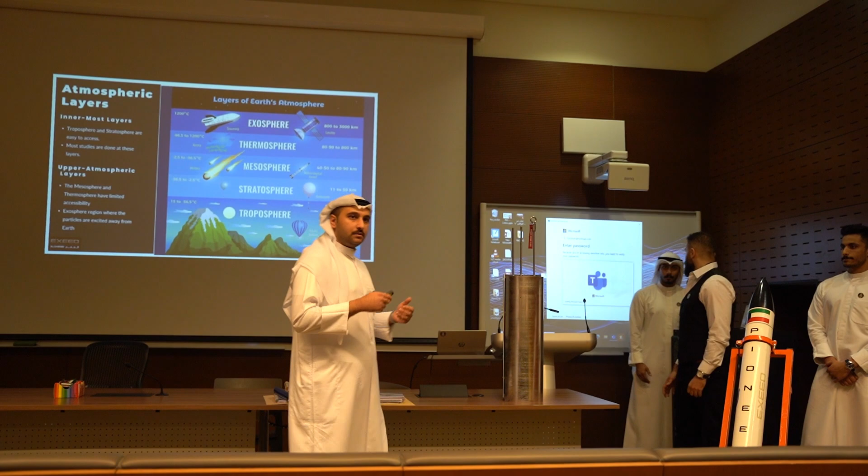The atmospheric layers, as you can see, are 5 different atmospheric layers, which are the innermost ones, the troposphere and the stratosphere. Since they are low in altitude, we have many studies about them, and they are where most of the weather occurs. The upper atmosphere, starting from the mesosphere until the exosphere, is much higher.

We have little studies about them, but it is important to study these atmospheric layers because they enable us to make future predictions about climate change, and because they affect matters concerning the ecosystem and the safety of occupants on Earth. It was found through study that there is a phenomenon taking place right now called the

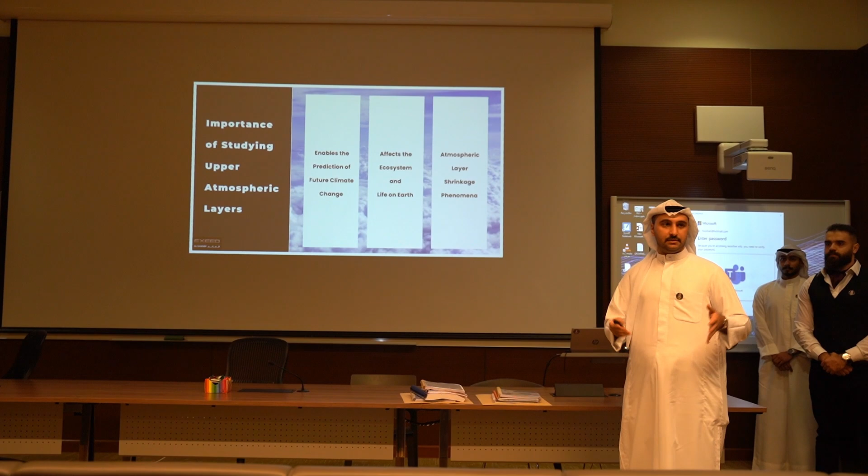shrinkage of the atmospheric layers. This shrinkage of the atmospheric layers would make it much easier for space debris to enter our ecosystem, making it unsafe for occupants on Earth. So it means there is a necessity for studying these upper atmospheric layers.

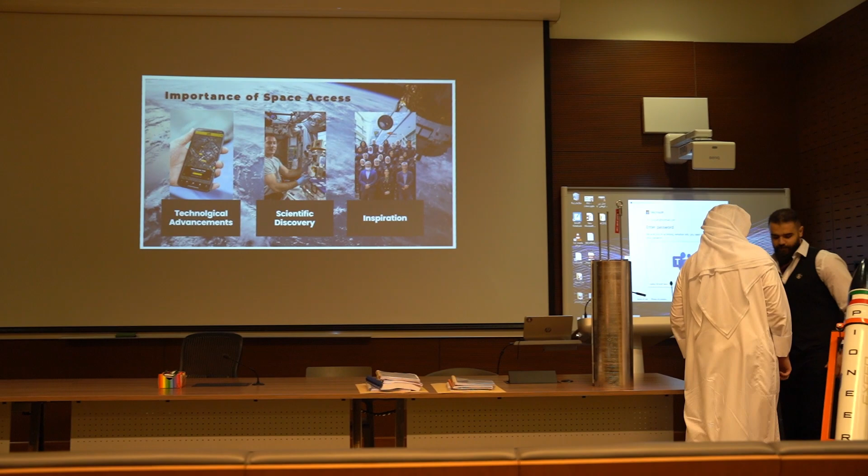Now, going for the importance of space. Space plays an important role in many aspects of our lives: television, communication, navigation, and security control systems that we rely on nowadays on our daily basis, like GPS and mobile phone calls that we can't do without.

Also, technological innovation by-products, same like CAT scan and mobile phone cameras, that we rely on nowadays. Also, it encourages the youth for STEM fields, which is science, technology, engineering, and mathematics field.

But now, how to reach space? Space can be reached via 3 different flights: planetary flights, orbital flights, and suborbital flights.

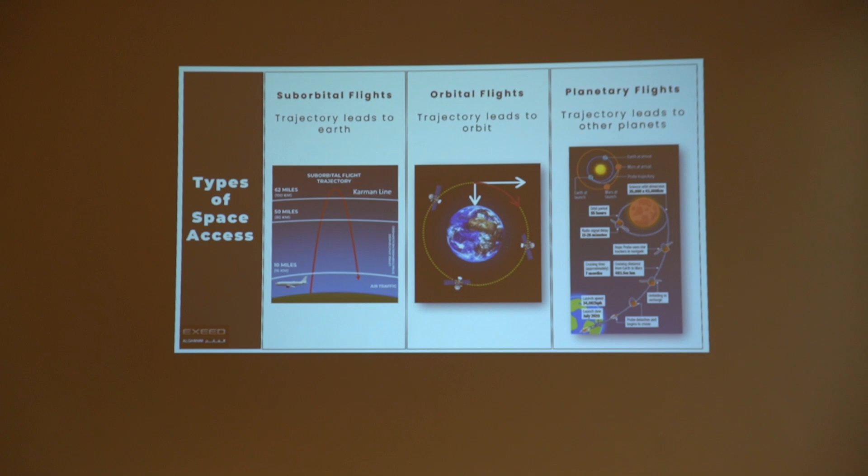Let's start first with the planetary flights, which are the type of flights that requires planetary velocity in order to reach other planets if there is a need to conduct some experiments there and to stay for such a long time.

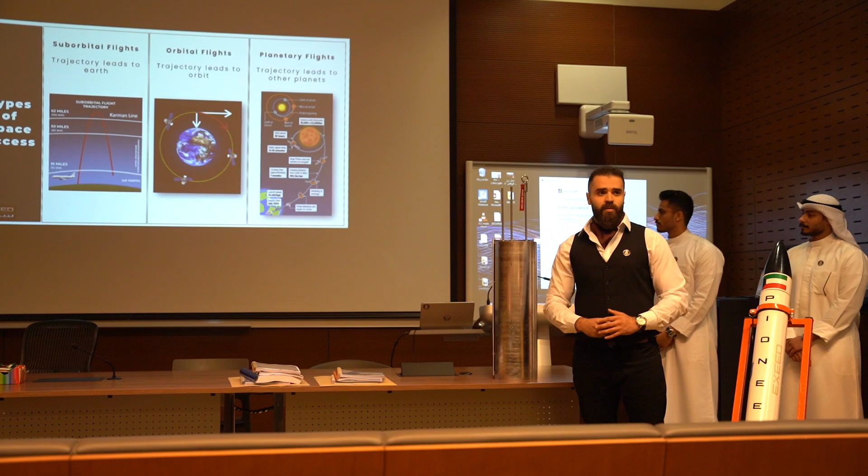Going for the orbital flights, which are the flights that require reaching an orbital velocity in order to reach a predefined orbit if there is a need to conduct some experiments there, and it's basically for communication and navigation reasons. Going for the cheapest and most affordable way to reach space, which is via the suborbital flights.

They are the type of flights that requires a velocity less than orbital velocity in order to go in a predefined trajectory and return back to Earth after conducting some microgravity experiments and atmospheric experiments there.

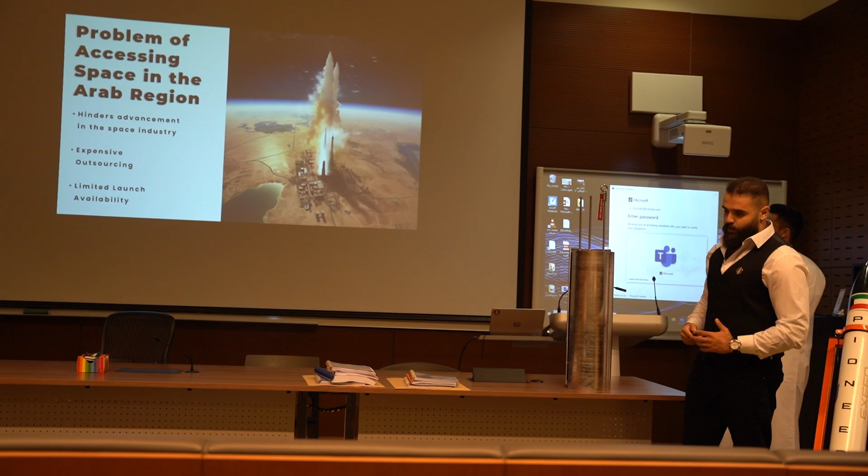Now, the problem is that we can access space, but only from foreign countries. We cannot access space locally from the Gulf. That's why there's a problem. They put us in their time frame, in their time schedule, and they put their flights in priority over

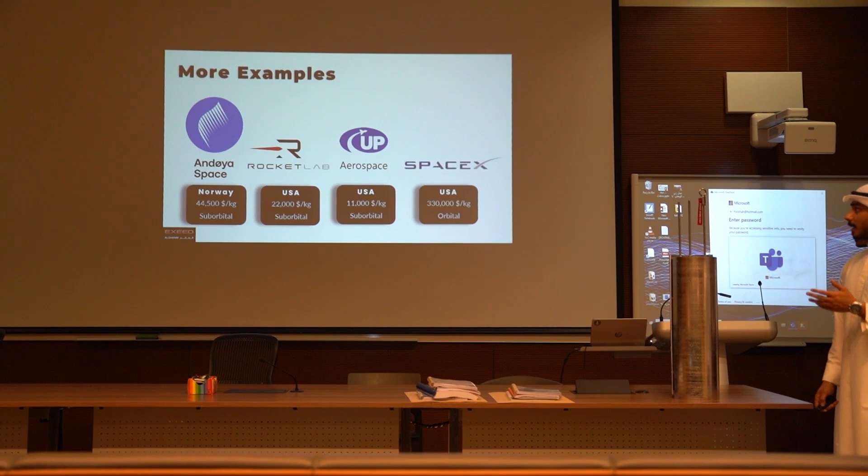Moving on with more examples of companies that provide access to space. There are many companies that provide access to space, but it can be shown here some of them.

For example, we have Andøya Space. It is a Norwegian company with a suborbital flight. It lands payload with a cost of $44,500 per kilogram of payload.

Another example of an orbital company is SpaceX, which launches payload to space at a cost of $330,000 per kilogram of payload.

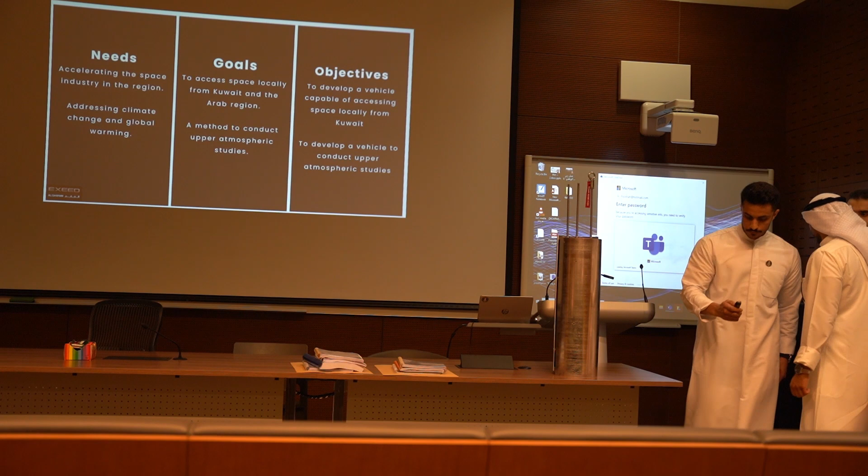So after thorough research in both space and the atmosphere, we see a need to accelerate space and its industry in the Gulf and the Arab region, and also to address climate change and global warming. So the goal of this project is to access space locally from the Arab world and Kuwait, and also develop a method to conduct upper atmospheric studies. This will be done by developing a vehicle capable of reaching both space and the upper atmosphere.

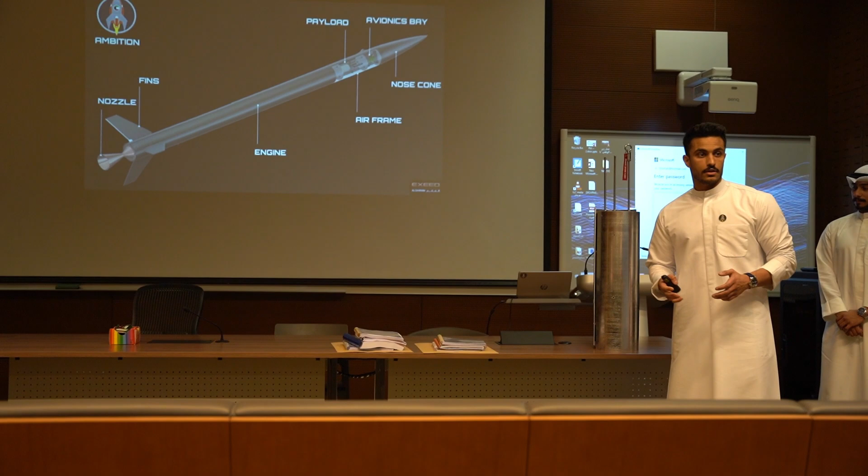So the solution to this was to develop a rocket. This rocket is composed of various sections that work in parallel together. We have the first section, the nose cone, the avionics bay, airframe, payload, engine, and nozzle. They work together to reach altitude and succeed in the intended mission of the rocket.

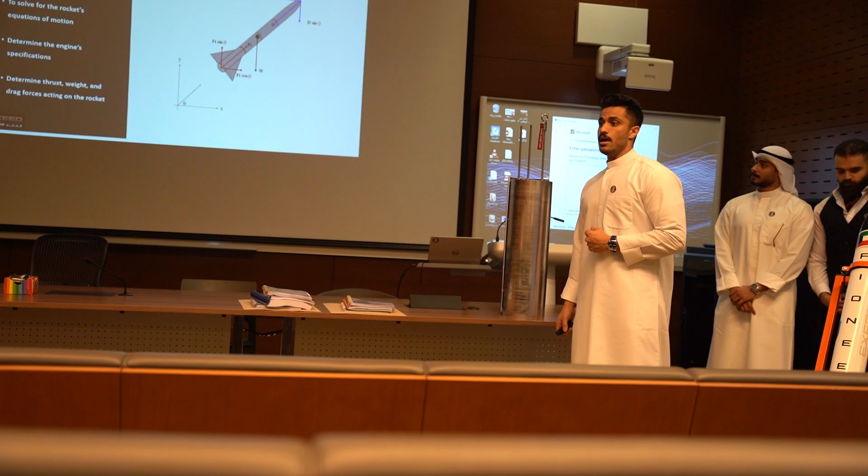So initially, before designing any component, we started with a flight analysis. Through this flight analysis, we can gain the necessary criteria and values required for design, such as thrust force, weight, and drag. We started with the rocket's equation of motion that took into account the various forces on the rocket, and also the variation of density, pressure, and the mass of the rocket as it ascends in altitude towards space.

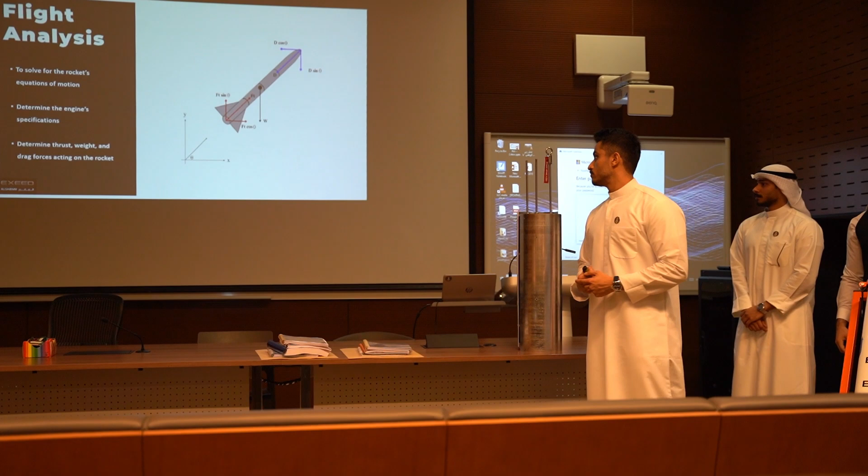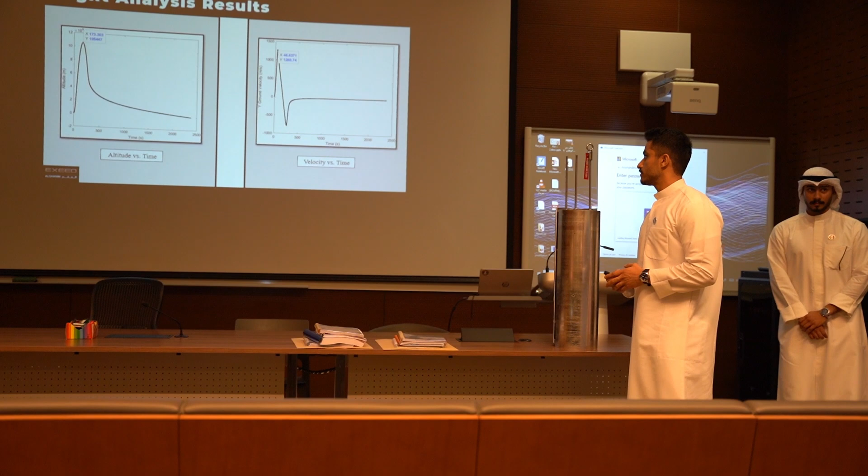The code used was provided by the KSR team through engineer Simon Faith, and through the code we can also get the engine specifications, such as the amount of fuel and the nozzle specs that would aid in selecting the engine. After various iterations of the flight analysis, we got these figures here.

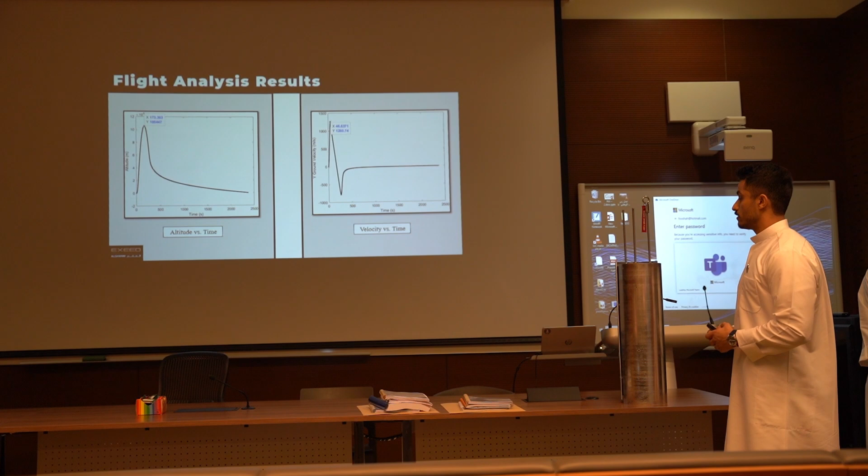These figures take into account the parachute ejection altitude, and you can see that the max altitude occurs at 105 kilometers, which means the rocket was successful in reaching space. And after that, the descent, you can see that with time it becomes slower and less steep. This is because the parachute is ejected.

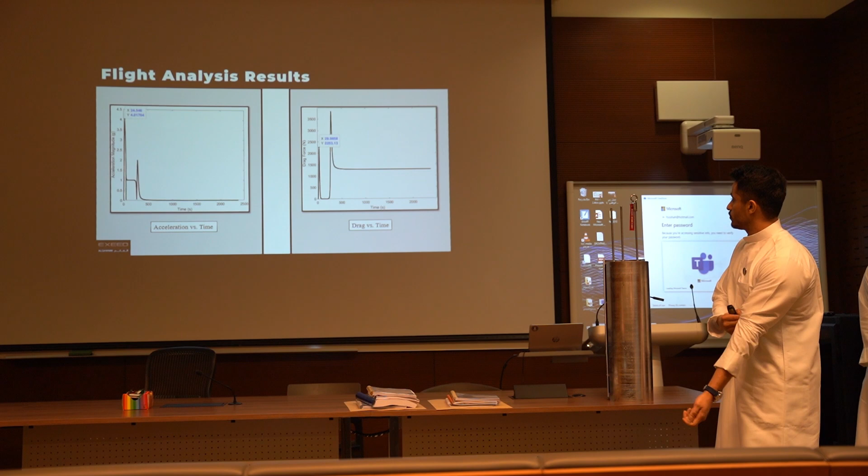And for the velocity, we reached a max velocity of 1,260, which is around Mach 3.6. For the acceleration, we got a max acceleration of 4 Gs, which is 4 times the acceleration of gravity of Earth. And the max drag force, you can see the first peak is 2,253 newtons.

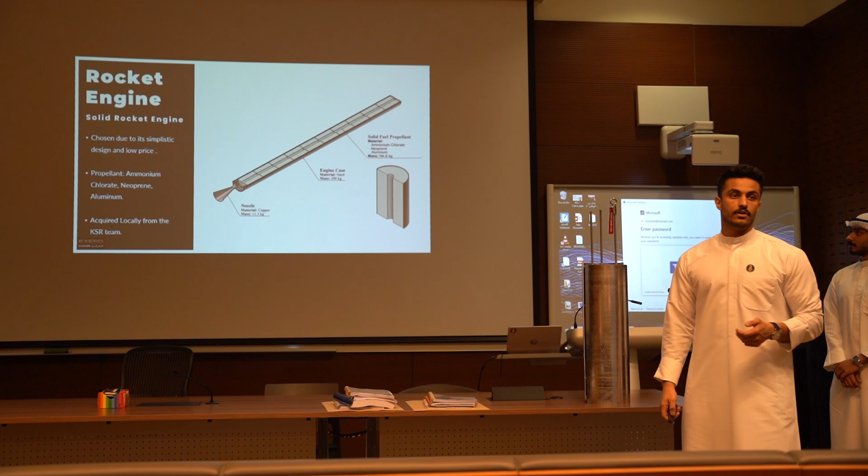The second peak is the ejection altitude of the parachute. And now for the rocket engine, we selected a solid rocket engine based on neoprene, aluminum, and ammonium chlorate. The choice was due to the ease of manufacturing and less complexity compared with other engines such as hybrid and liquid. And the engine would be acquired locally from the KSR team.

The total propellant mass was 184.6 kilograms, and the thrust produced by the engine would be 8.73 kilonewtons.

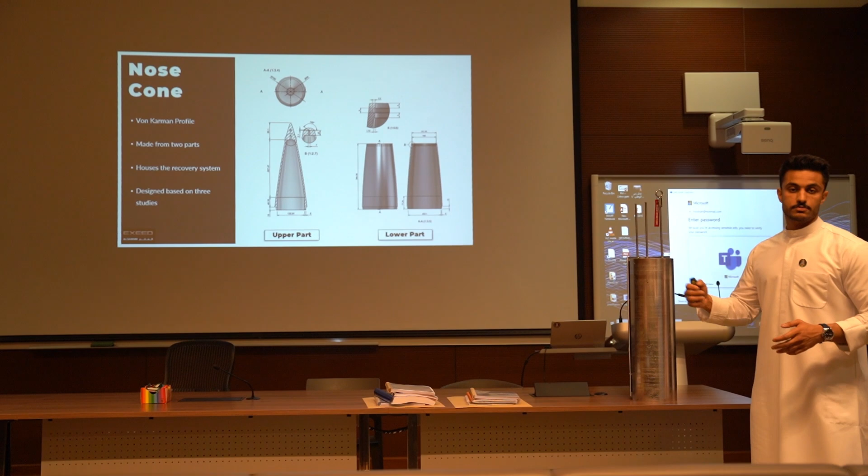For the first designed component of the rocket, the nose cone, we selected the von Karman profile from various profiles due to its aerodynamic superiority. It was designed to be made of 2 parts, a top part of aluminum and a lower part of PLA for mass conservation purposes. It houses the recovery system and acts as a drag reduction component.

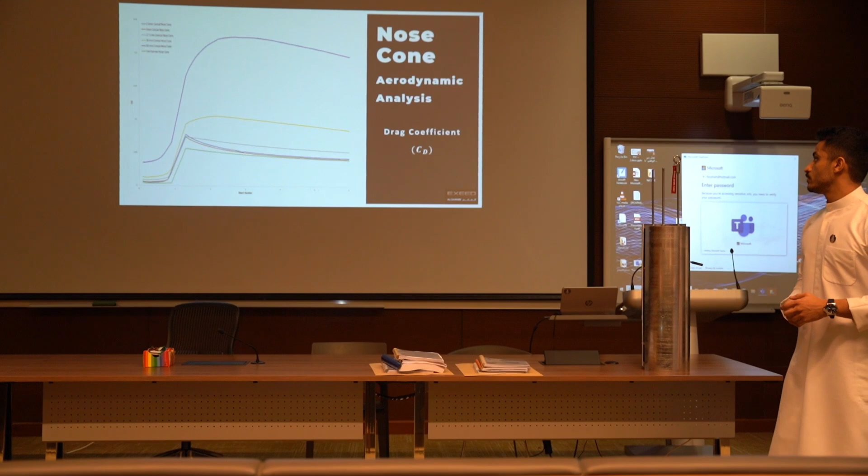So the design was based on various studies. The first study was an aerodynamic study based on COMSOL that used the high Mach number flow module. Through it we tested 6 different profiles, conical shape profiles with varying fillets, and the von Karman profile. As expected, the best aerodynamic performance goes to the von Karman due to the least coefficient of drag values.

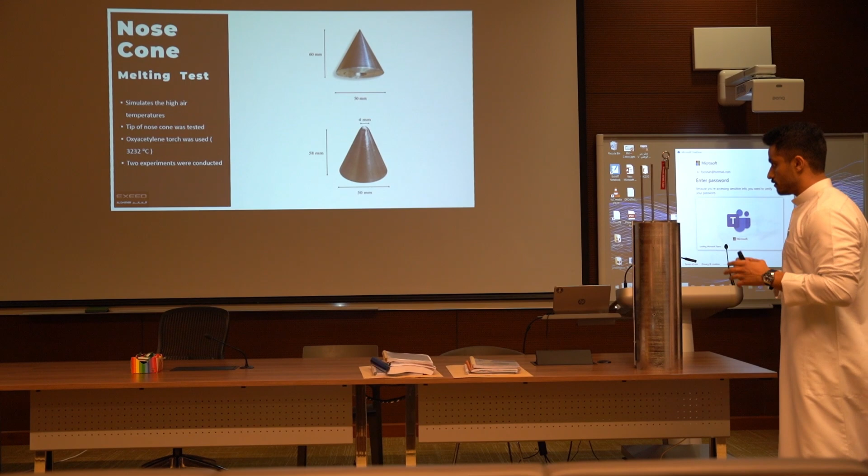So after that, we did a couple of tests to check whether the tip of the nose cone would melt due to aerodynamic heating. We did this test because through the aerodynamic analysis, we got a max temperature of 1,400 Celsius, and this might melt the tip of the nose cone.

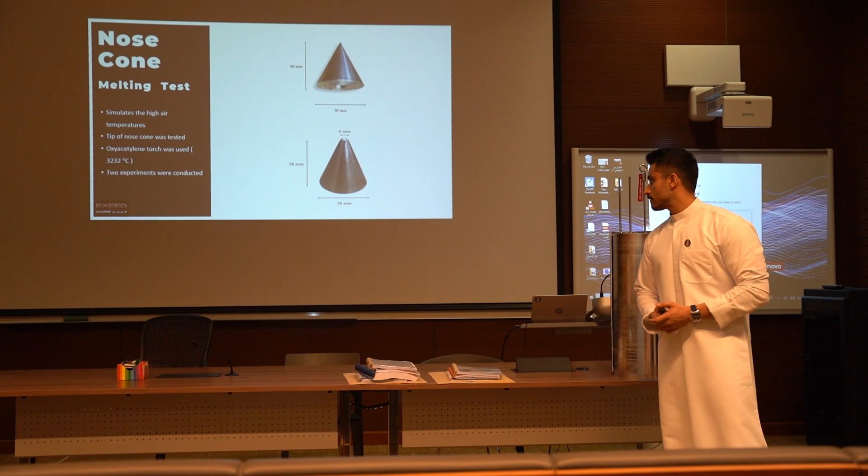This experiment used an oxyacetylene torch producing a neutral flame reaching 3,232 Celsius. We tested two tips, one filleted and one sharp.

For the sharp tip, it started to melt at 10 seconds and was neglected. We went ahead with a filleted nose cone, which sustained the temperatures up to 25 seconds, and it was chosen for the rocket.

After that, we did a structural test to check whether the PLA would take the forces. It was a static test based on putting plates on top of the PLA part, and it sustained the max drag force of 2,200 newtons. By simulation, that's around 240 kilograms of weight. Now I'll leave you with Hamad to talk about it.

Going for the airframe: as you can see, it consists of 3 radial threaded rods with aluminum plates in between, with air covers surrounding them, and bolts that connect the air covers to the aluminum plates.

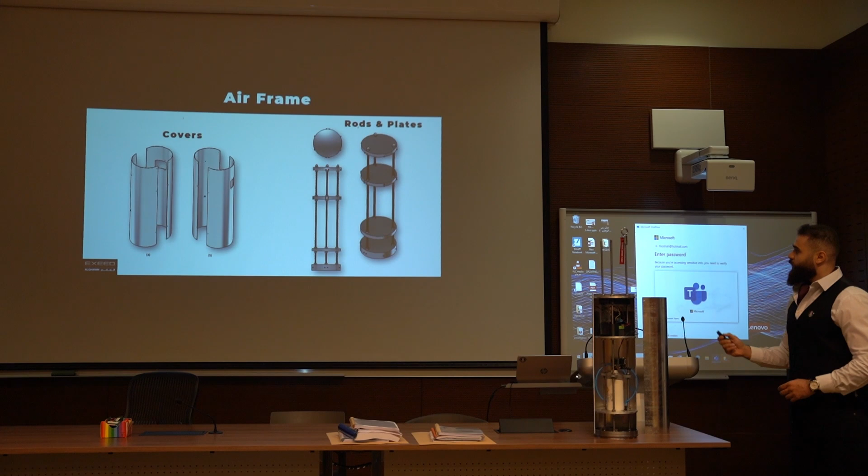We conducted a free body diagram of the whole rocket to see what type of loads it will face during flight. It results that the airframe will be squeezed between two normal forces at the top and bottom, calculated to equal 5,943 newtons, and we based our stress analysis on this value.

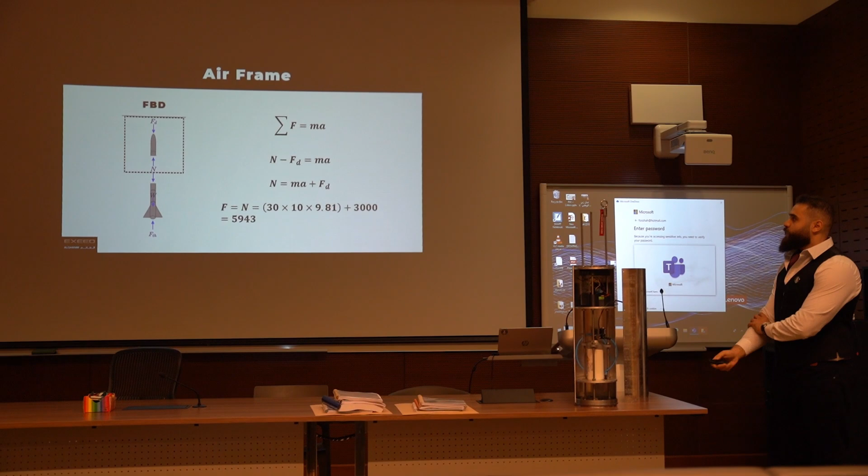We did 4 types of stress analysis: buckling, compression, shear, and bending. Buckling and compression analysis were done via COMSOL, and shear and bending stress analysis via MATLAB.

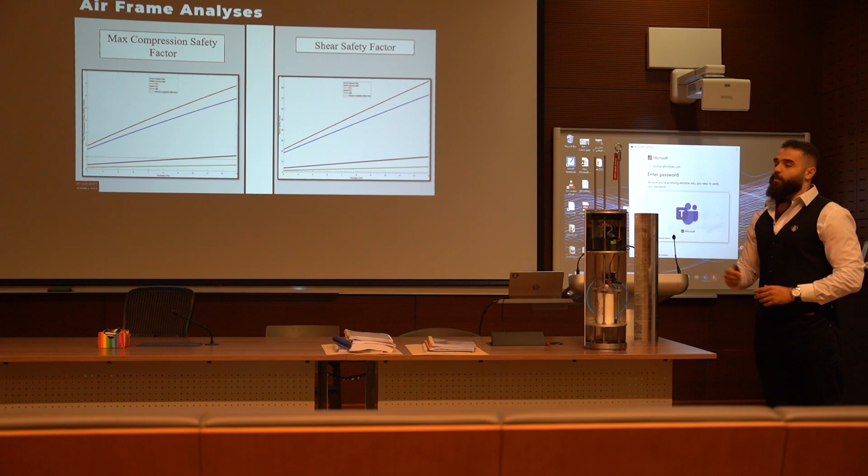Stress analyses were done and safety factors calculated to prove the design will take the load. It resulted that having 3 M12 stainless steel threaded rods with 8 mm thick aluminum plates and 3 mm thick aluminum air covers will take the load.

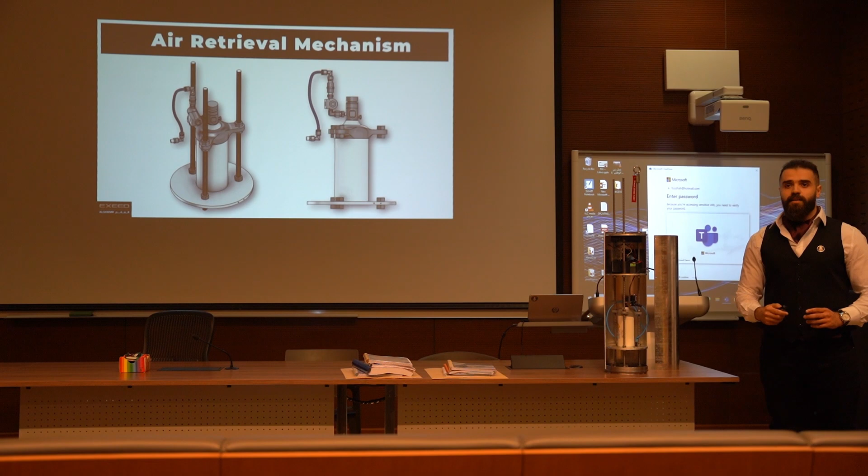Going for the air retrieval mechanism, which aims to retrieve 1 liter of air at 50 kilometers altitude above Earth's surface during deployment of the rocket. The air sample is then studied in the laboratory for its chemical composition, to try to stop the propagation of climate change and global warming phenomena that we are facing nowadays.

As you can see, it consists of a ground evacuated air tank, valve fittings, a solenoid valve, and a hose that connects the outside with the inside.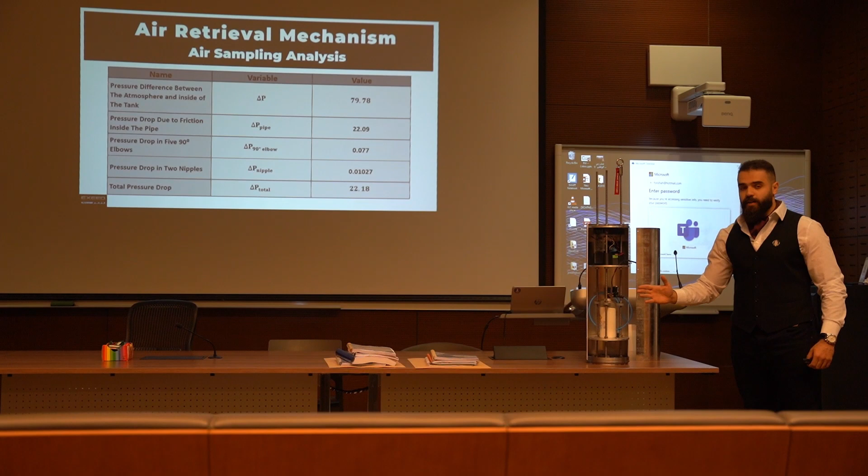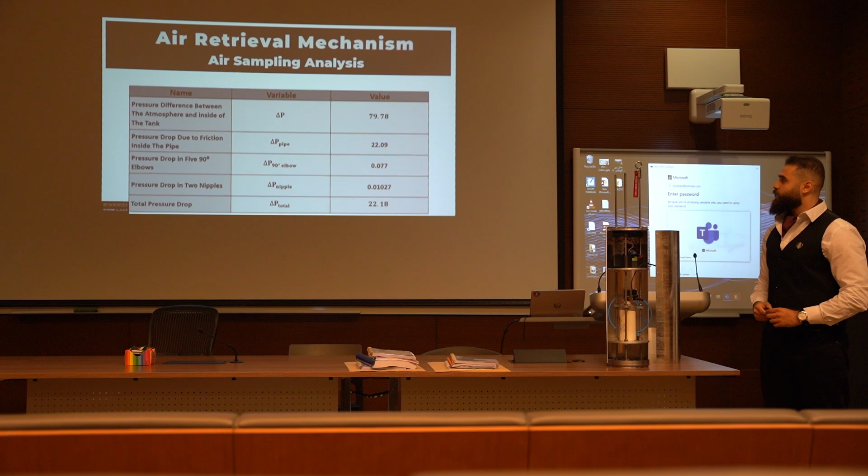It functions when the altimeter inside the avionics bay, the flight computer, sends a signal to the solenoid valve that the rocket reaches 50 kilometers above Earth's surface during deployment, letting the valve open. Air will enter the tank due to the pressure difference. Calculations were done to prove that the air will enter the tank due to just the pressure difference, with no outside pumping source.

Now I leave you with Basil for the avionics bay and recovery system. The recovery system was designed with the purpose of recovering the payload safely and reusing the rocket, or most of its components, for economical reasons.

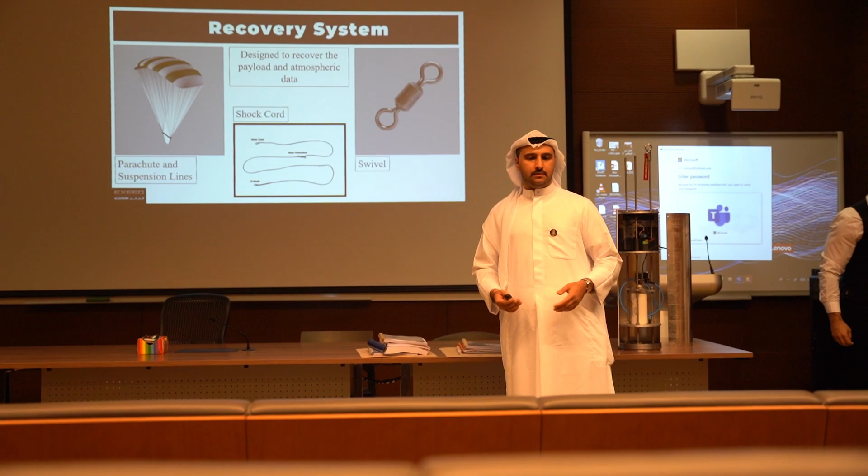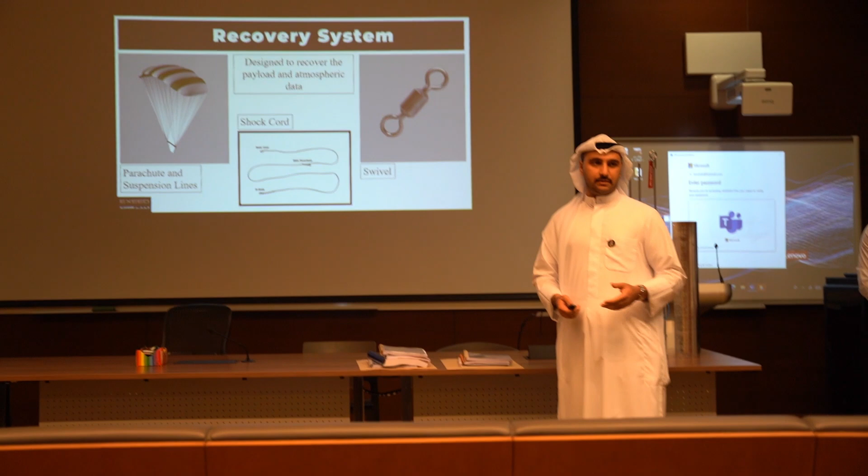The recovery system consists of several components such as the swivel, the shock cord, the suspension lines, and the parachute. The parachute has a diameter of approximately 5 meters, found using an aerodynamic analysis based on the amount of drag force acting on the rocket during descent.

The final component of the recovery system is the ejection piston cylinder mechanism, designed based on the isentropic expansion of the solid fuel located in this chamber. Upon expansion, it causes the piston to eject the nose cone and the parachute with it, initiating the recovery process.

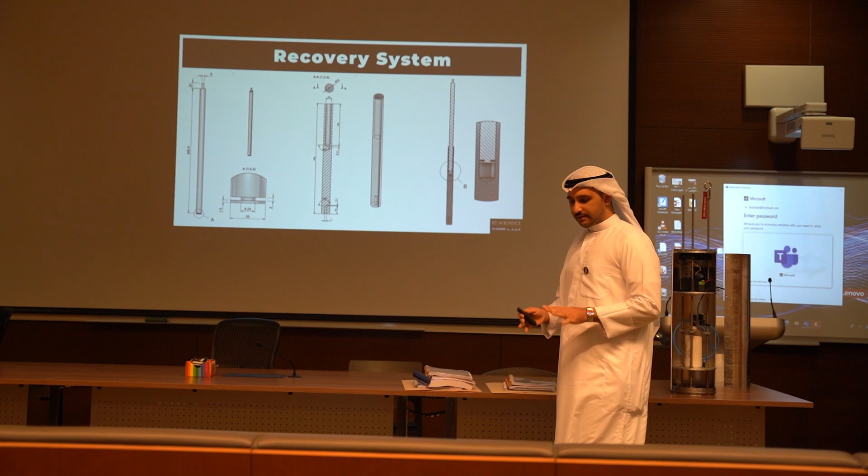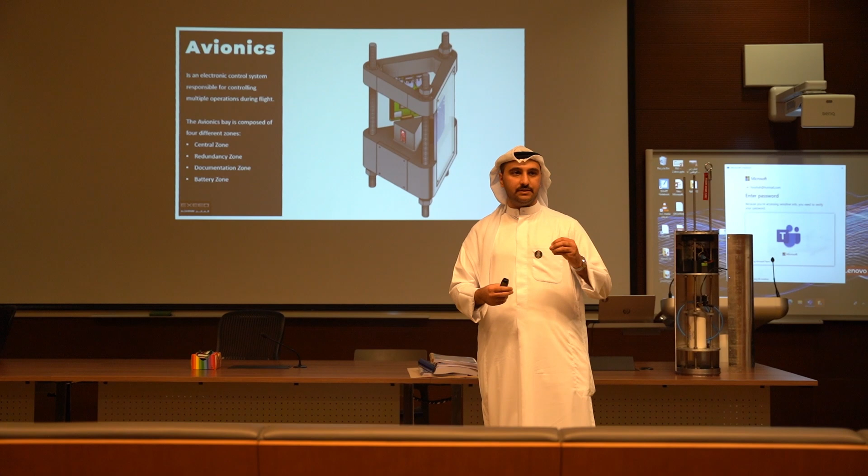After getting familiar with the complex operations taking place during flight, there was a need for a control system that can monitor and control all of these operations. This control system is commonly known in the aerospace industry as the avionics system, a set of sensors and microcontrollers that work in integration with each other to perform a series of tasks and operations.

As you can see, it's located in the avionics bay, divided into four different zones: the redundancy zone, where extra microcontrollers and sensors can be added to the system.

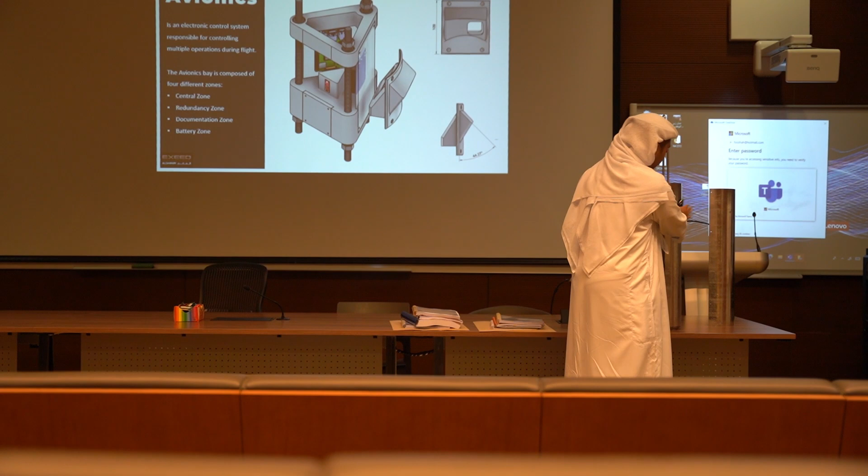The documentation zone houses a GoPro housing that will document the entire flight. A battery zone was designed based on heat transfer analysis to keep the battery compartment within operating temperature. And a central zone that houses the central circuitry.

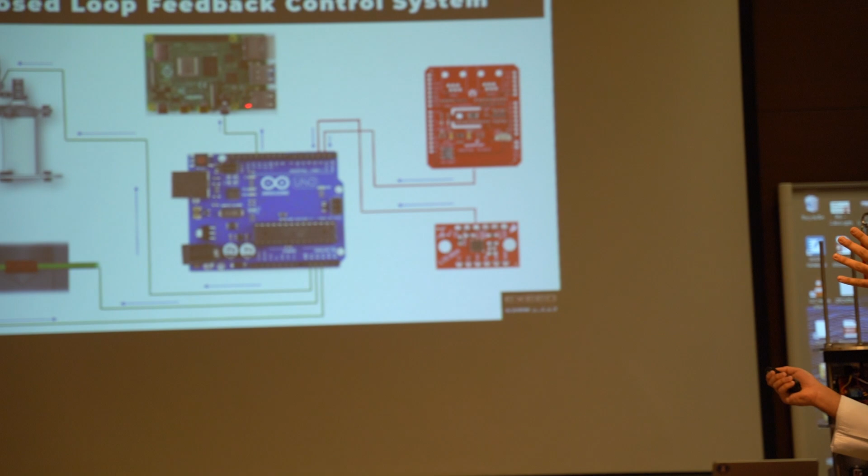The circuitry was designed for a closed loop feedback control system that depends on 6 sensors: temperature, humidity, acceleration, pressure, gyroscope, and magnetic field, which send serial analog data to the Arduino. The Arduino performs 2 functions: one is to send backup data to the Raspberry Pi, and the other is to operate the air retrieval mechanism, the solenoid valve, opening and closing it at the predefined altitude of 50 kilometers, and to ignite the nichrome wire in the ejection mechanism to commence the recovery process.

Now I leave you with Isa on the fins. And now for the fins.

The fins play a crucial role in maintaining the stability of the rocket throughout the flight by increasing the distance between the center of pressure and center of gravity. This is due to the increased surface area and lowering center of geometry. So during the flight of the rocket, it may face an inclination angle, and a lift force will act on the center of pressure, creating a moment around the center of gravity to return the rocket back to its original path.

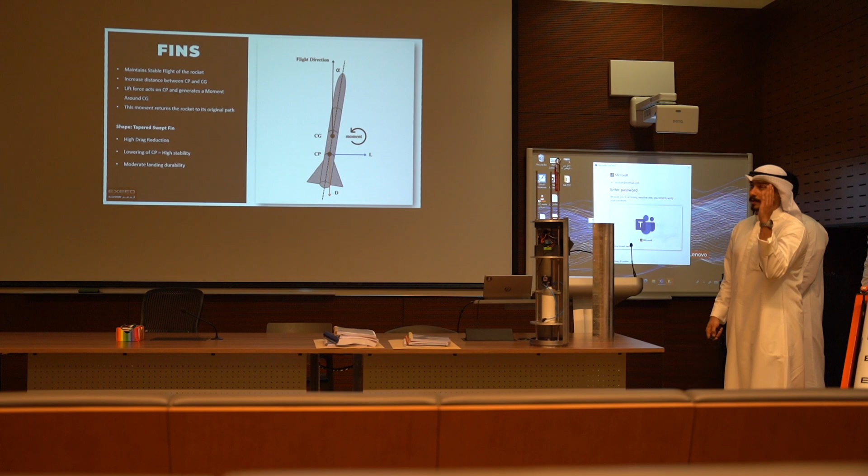For the shape of the fin, we chose a tapered swept fin due to its high drag reduction and high stability.

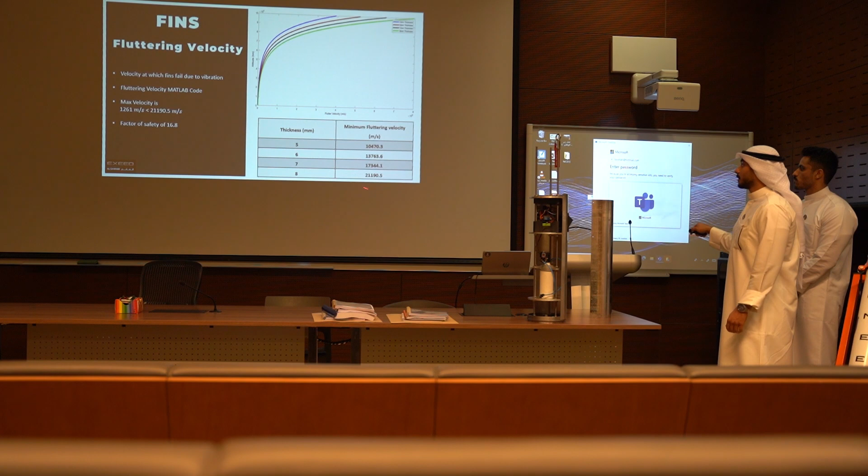Now for the fluttering velocity, the velocity at which the fin will fail due to vibrations. We developed a MATLAB code that calculates the fluttering velocity versus altitude for different fin thicknesses: 5, 6, 7, and 8 millimeters. We chose the 8 millimeter thickness fin because it has the highest minimum fluttering velocity.

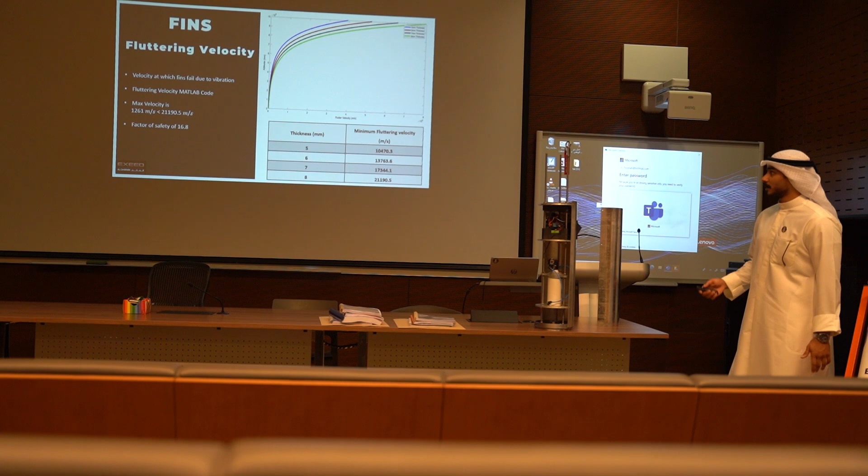To ensure that the fin won't fail due to vibrations, the maximum velocity of the rocket must be lower than the minimum fluttering velocity. Our maximum rocket velocity is 1,261 meters per second, which is much lower than 21.1 thousand meters per second, giving a factor of safety of 16.8.

After that, we inserted the 8 millimeter thickness fin into Open Rocket Simulator, a program that simulates the rocket and tells if it is stable during flight. We put in the 8 millimeter thickness, and through many iterations, we found the other parameters of the fin.

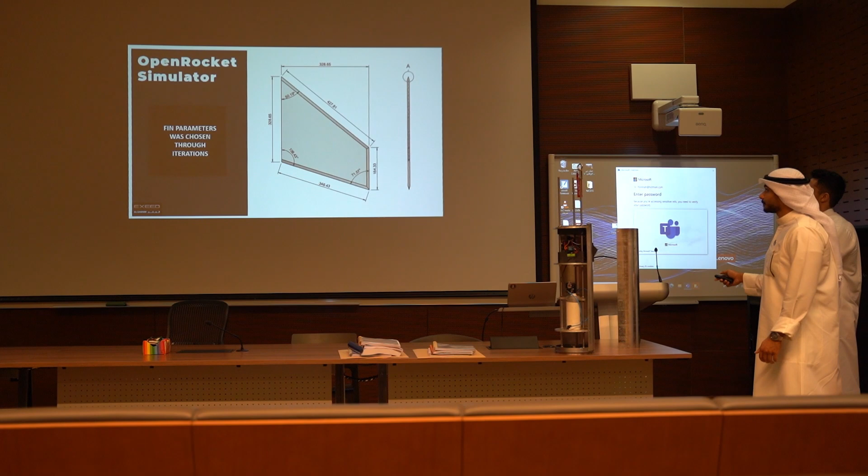Then we inserted the whole rocket with the fins on it to calculate the stability of the rocket, and it was 3.94 calibers. A caliber is a unit to measure the stability of a rocket, and it depends on the center of pressure and center of gravity.

Now for the fin attachment, we designed an attachment for the fin to be bolted into the bracket, which will be welded into the body of the rocket.

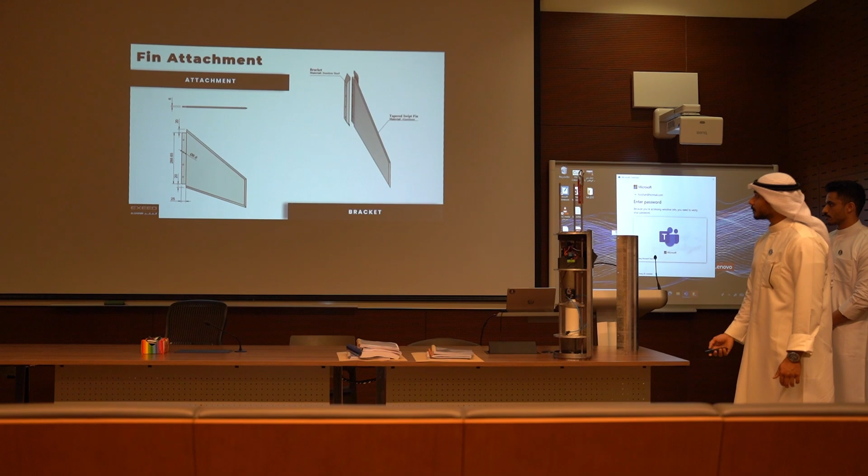And now for the ambition overall design. This is the ambition overall design, having a diameter of 0.19 meters and a total length of 4.88 meters. As you can see here, when we remove the cover, it shows the avionics bay and the air retrieval section.

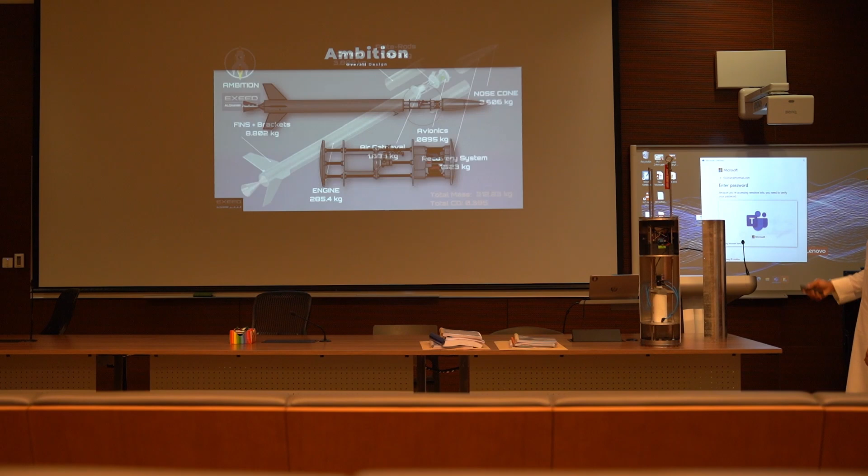Now the total mass of the rocket was 312, which is considered lightweight in comparison with other suborbital rockets.

Finally, the total cost of the ambition rocket was 3,263 Kuwaiti dinars, which is much lower than the average price of 20,000 Kuwaiti dinars according to the NASA Rocketry Handbook. Thus, the objective of having a cost-effective suborbital rocket has been successfully met.

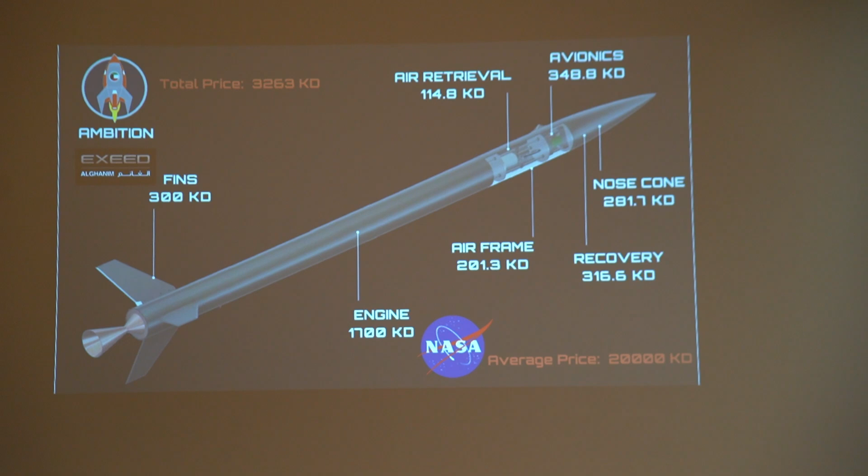So now with the safety zone. Various safety analyses were conducted on the rocket to assure safe flight and the safety of personnel operating the rocket. The first safety analysis was the safety clear zone.

It tells you, if the rocket were to explode on the launch rail, what the minimum distance is that you should be away from. This analysis was based on the Federal Aviation Administration and the U.S. Department of Defense standards. We assumed that the entire propellant acts as TNT, and upon explosion it would give a peak incident overpressure distance of 101 meters.

That means the pressure at that distance would be safe for humans to be. The hazard fragment distance is 366 meters, meaning the shrapnel and metal of the rocket, if it explodes, wouldn't be at high enough velocities to harm anyone standing there. Taking a factor of safety of 3 gives us a distance of 1,100 meters as the radius of the safety clear zone.

Another analysis done was the landing zone of the rocket. It was based on a 4.9 meter parachute, as discussed by Basil, with a drag coefficient of 2.2. We chose a descent rate of 7.6, recommended by the NASA rocketry website, and an ejection altitude of 40 kilometers. This gave us a landing zone diameter of 10 kilometers.

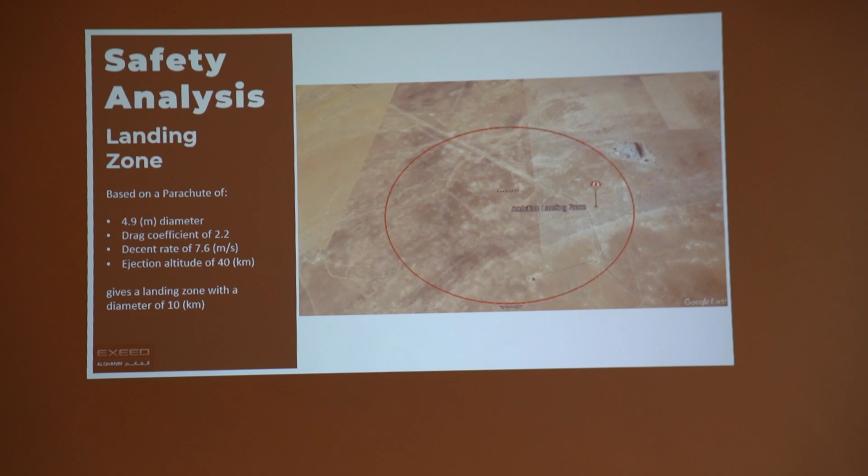So you can see here in the Google Earth video, it shows the landing zone of the rocket. This circle is 10 kilometers in diameter, and we assume the launch happens in the center of the circle at Adera launch range, which is used for military exercises and launches. So it's a good range within the Adera range, and it doesn't go out to other areas.

So the Ambition rocket is quite large, 4 meters in height, and it would take a lot of time to build and present here in the timeline of the course.

We went ahead and built a prototype rocket, the Pioneer. Pioneer is a small solid rocket engine rocket that flies up to 500 meters. It has a length of 1.37 meters and it's scaled down by 3.5. It tests the similar components and methodologies of the large rocket, but on a smaller scale that can be tested.

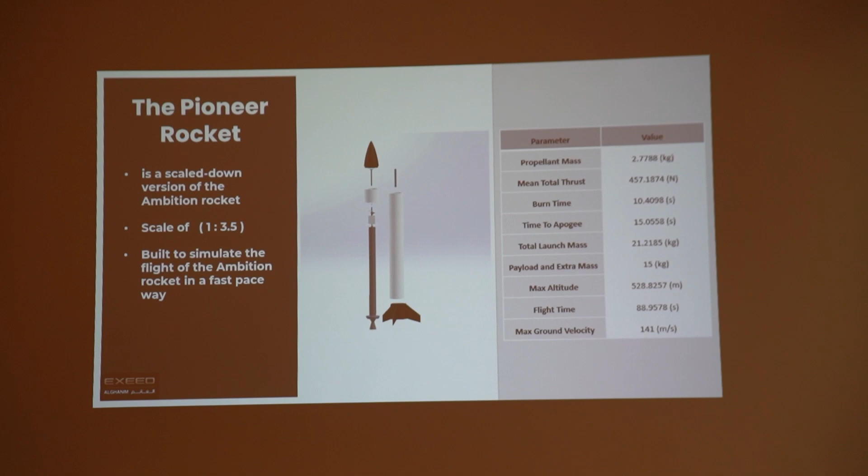Now we can see the specs of the rocket. It has a total propellant mass of 2.77 kilograms based on potassium nitrate and sugar, and also a total launch mass of 21 kilograms and a flight time of 88 seconds. It reached apogee at 15 seconds, which is the max distance of the rocket.

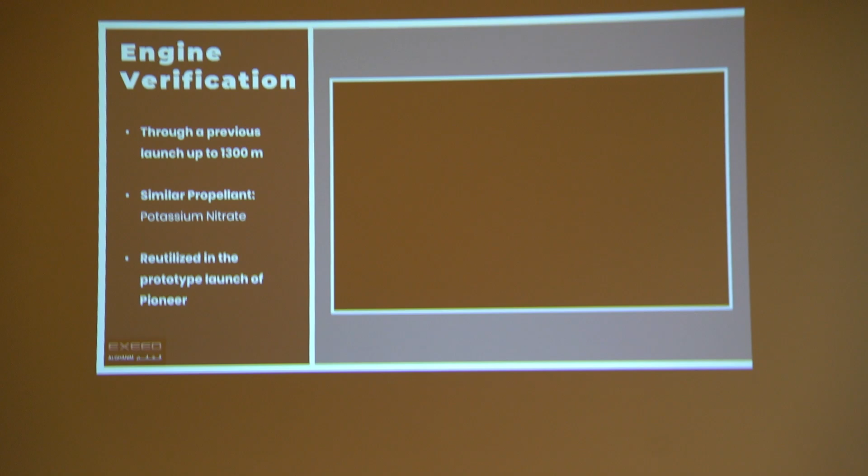So to validate our design of Pioneer, we conducted various tests to see if it would work upon flight, and here are the tests. The first is an engine verification. We utilized a similar engine that was flown before, a year ago, called the Ambition 1 engine. It's based on a small rocket, and it's verified.

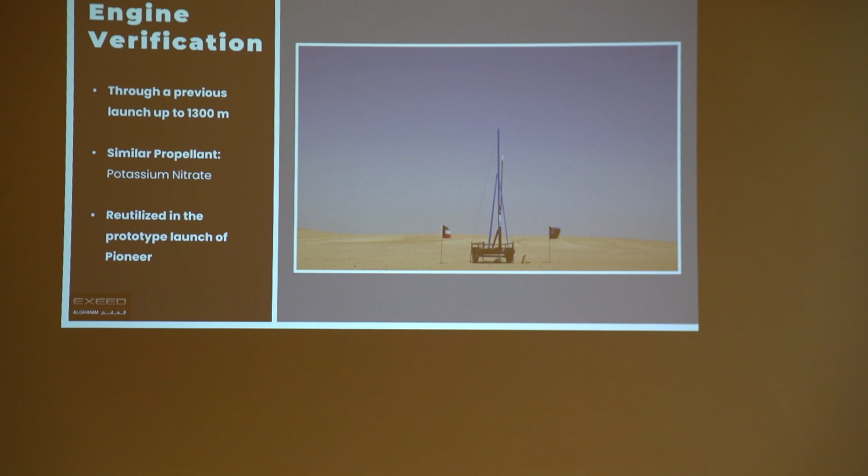This is the launch video. It went to a max distance of 1,300 meters and performed as analyzed. So this is the engine here retrieved, and it was able to sustain the combustion pressures, and was chosen and refurbished to be used on Pioneer.

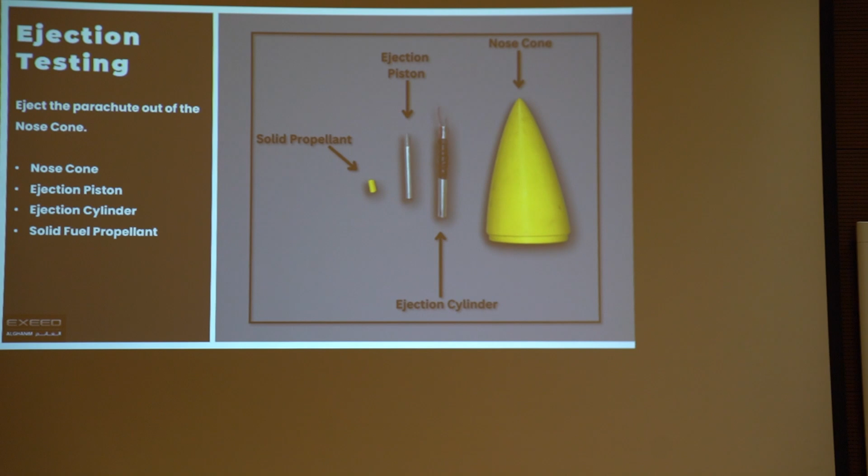Another test is the ejection testing of the parachute. In order to retrieve the rocket, we'd have to eject the parachute outside of it at apogee, the max distance of the rocket. The parachute is housed inside the nose cone, and we tested whether our designed ejection mechanism, similar to the Ambition large rocket, would work as designed. It has a solid propellant segment inserted in the piston sleeve, and upon ignition with a heating element, it would combust and push the piston out.

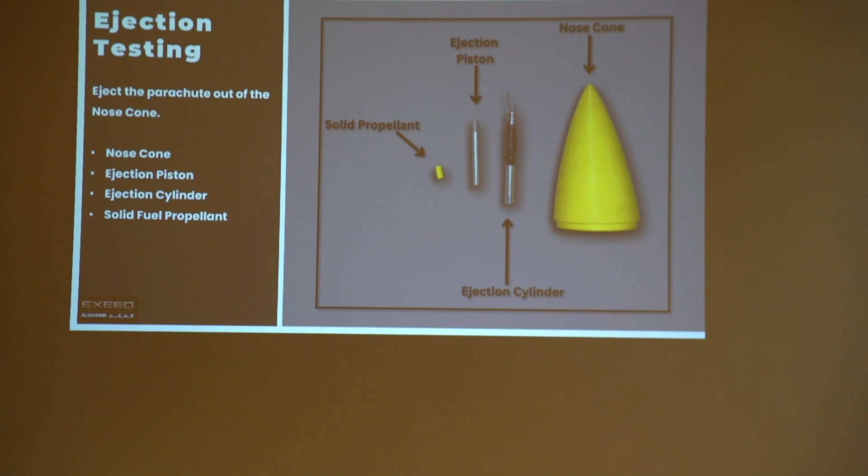And this is the video here of the test. You can see we did this in many iterations. It worked fine. It pushed the nose cone outside of the rocket, and this will happen at 15 seconds at apogee.

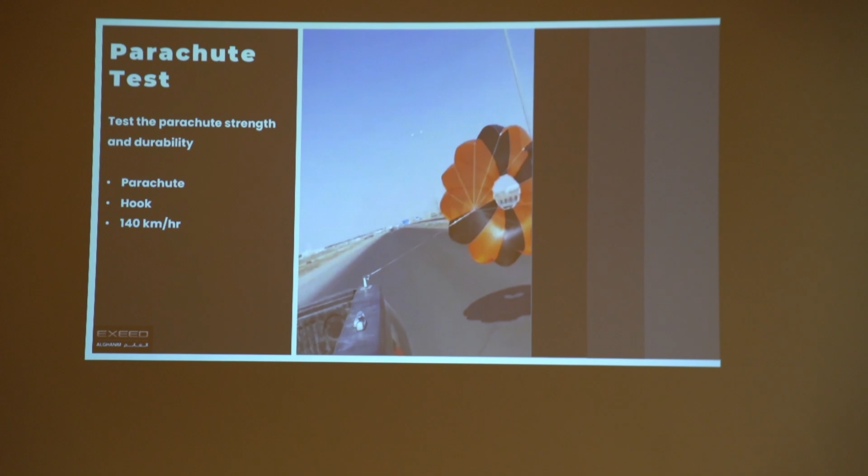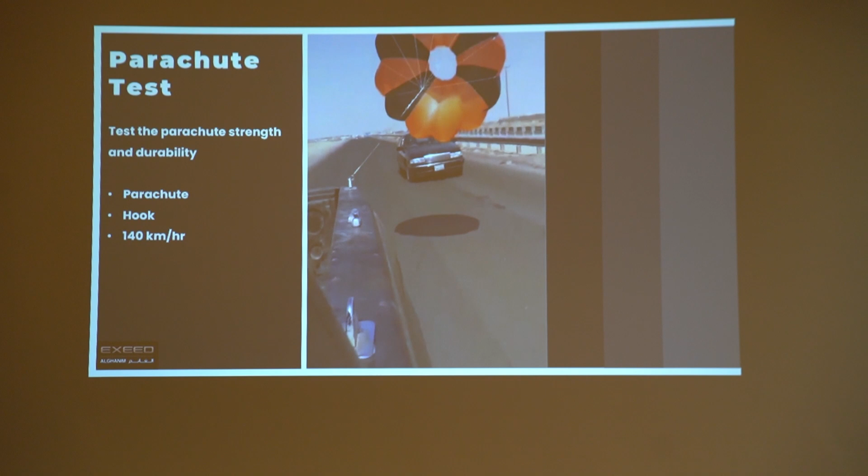Another test conducted was a parachute test of this parachute here. We previously tested this parachute at speeds up to 140 kilometers per hour. This simulates the rocket when it's descending, and would let us know if the shrouds and Kevlar ropes would be able to sustain the forces on the parachute, or if it would tear. It worked fine, and it took the forces and high velocities of that.

And now I leave you again with Mohammed to talk about the flight simulation.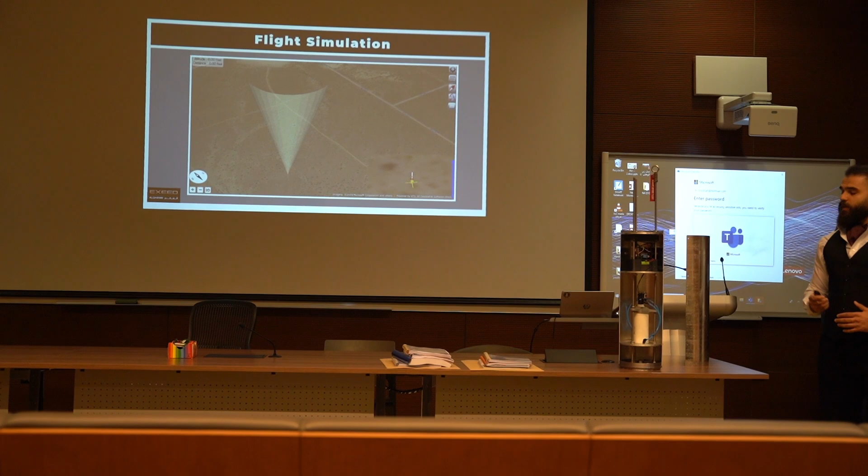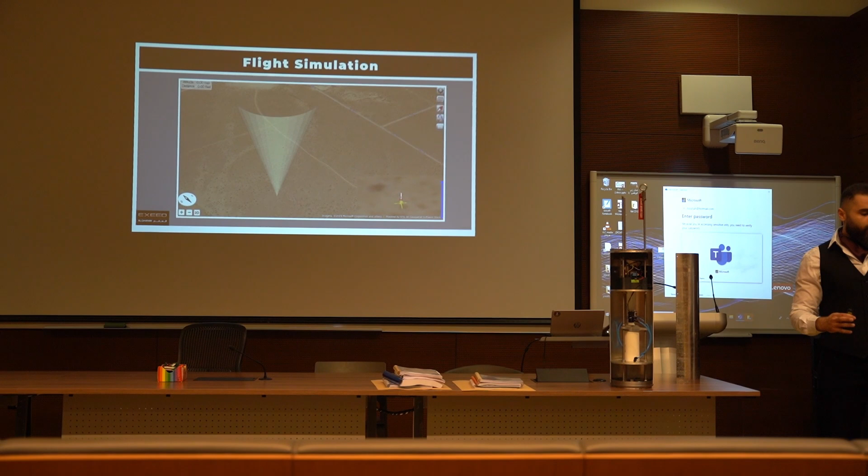Going for the flight analysis of Pioneer rocket, we simulated the flight path using a RockSim program, which is used to simulate suborbital flights. It gives the maximum altitude, the flight trajectory, and when the parachute will be deployed. The maximum altitude was simulated to be 238 meters, due to the maximum fuel load that the program can take. We used half of the fuel for the program, but for the MATLAB code verification with the full amount of fuel, the rocket will reach 500 meters.

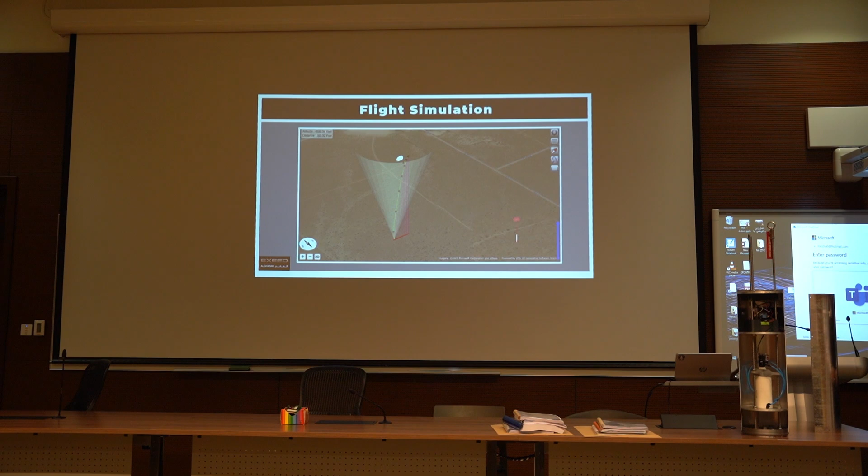Going for the video, here we have a zoomed in picture of the rocket, and here we have the flight path of the rocket. As you can see here, the parachute is deployed 5 seconds after apogee, when the rocket is tilted by 45 degrees. It will continue its path.

Going for the fuel of the rocket. We cooked the fuel of the rocket ourselves.

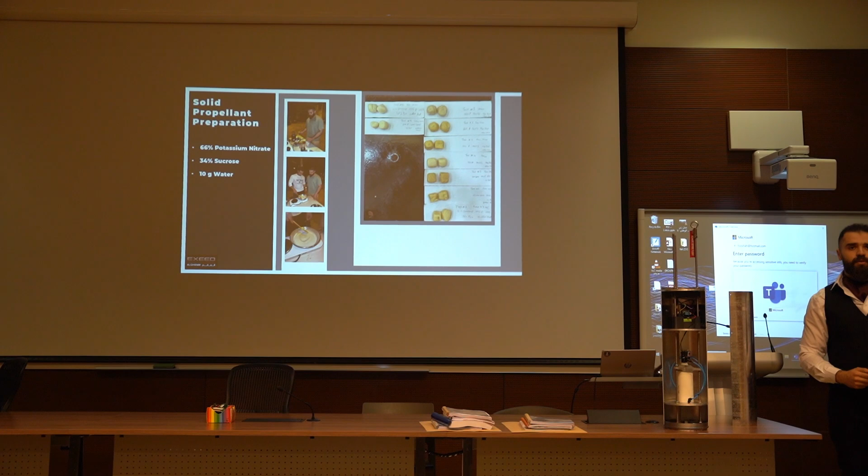We did 9 tests for different compositions and proportions of the fuel to test and choose between them in order of the burn rate and the cooking time. Test 4 was chosen to be the best test in terms of cooking time and burn rate, giving the fastest burn rate and the shortest cooking time.

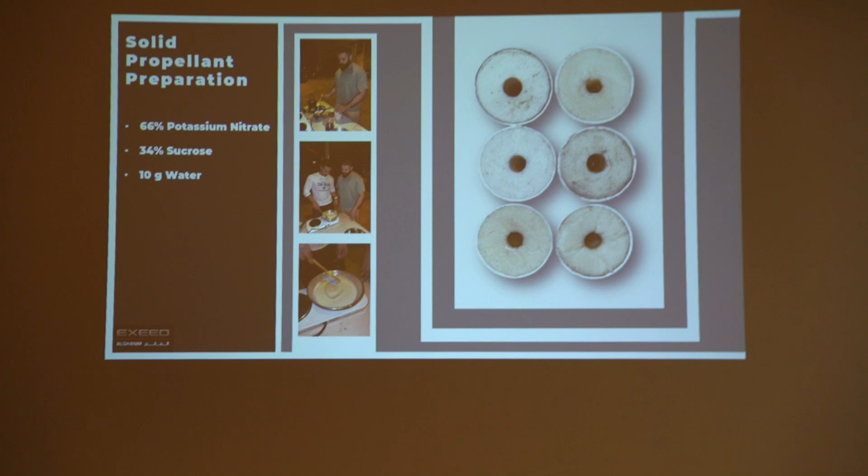We made 10 batches, 10 fuel segments of the fuel, which consists of 66% potassium nitrate, 34% sugar, and 10 grams of water for each 100 grams of propellant. The 10 segments will ensure that the rocket will reach 500 meters, simulated using a MATLAB code.

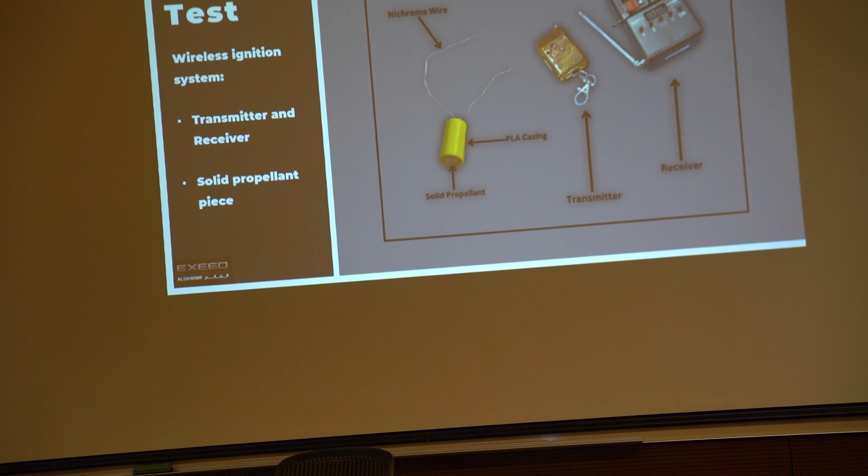Going for the ignition test. We did an ignition test on one of the fuel segments to test its burn rate. The wireless system consists of a transmitter, receiver, nichrome wire, and the fuel segment being tested. Once the transmitter sends the signal to the receiver, it flows a current into the nichrome wire, which has extremely high resistance, causing the nichrome wire to heat up and ignite the fuel segment.

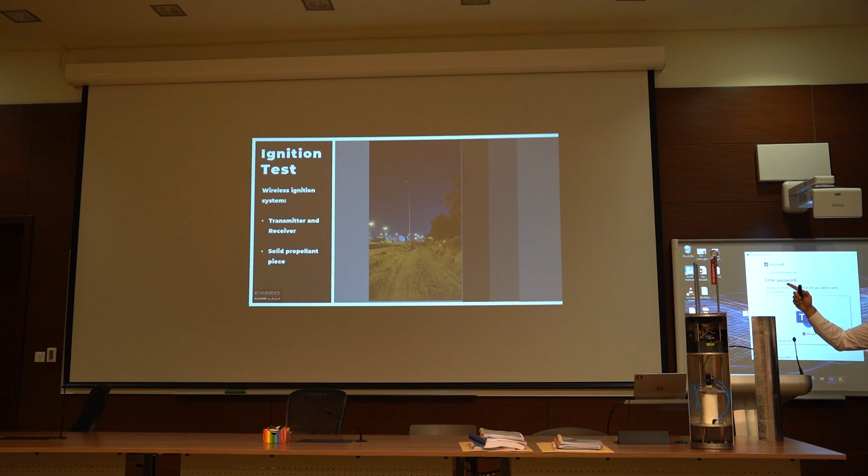Here is the video showing the ignition test. Here we are setting up the system. This is the transmitter, and the fuel segment is 150 meters away from us for safety reasons. It is now ignited successfully, and the video was zoomed in at this moment.

Now going for the air retrieval test. To ensure that the retrieval system would work efficiently during the flight of the rocket, we did a ground test using a vacuum pump, air tank, hose, solenoid valve, vacuum gauge, and a battery.

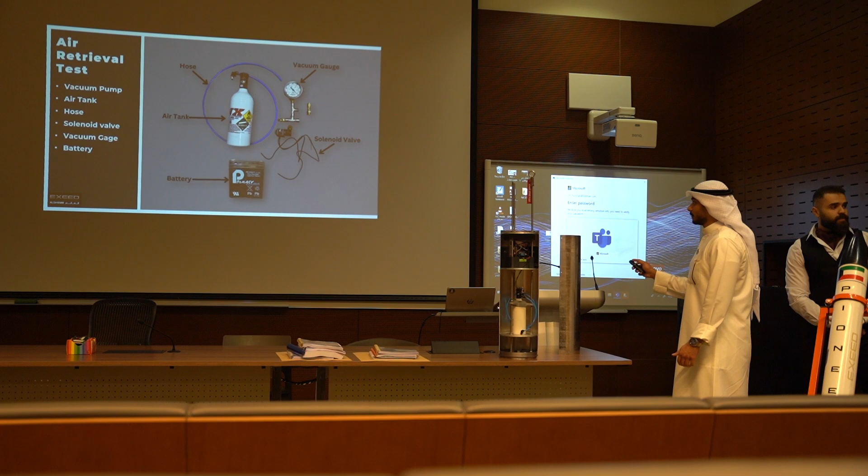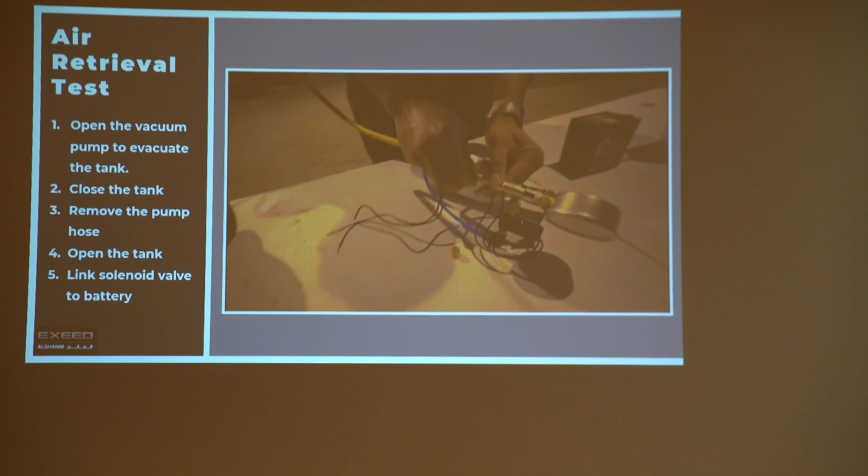Jumping on to the video. We will start our test by removing the cap of the tank. Then we will insert the hose of the pump into the tank. After that, we will turn on the vacuum pump to evacuate the air tank. As you can see, the pressure gauge is giving a minus reading, which means the tank is now evacuated.

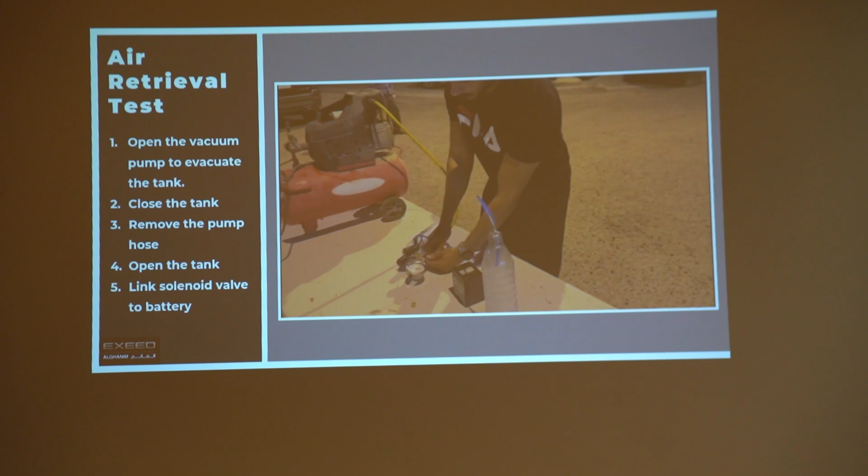After that, we will close the tank to ensure that it will still be evacuated, as you can see now. Then we will remove the hose of the pump. After that, we will insert the cap again and open the tank, as you can see now. Finally, the pressure gauge is giving a minus reading, which means the tank is still evacuated.

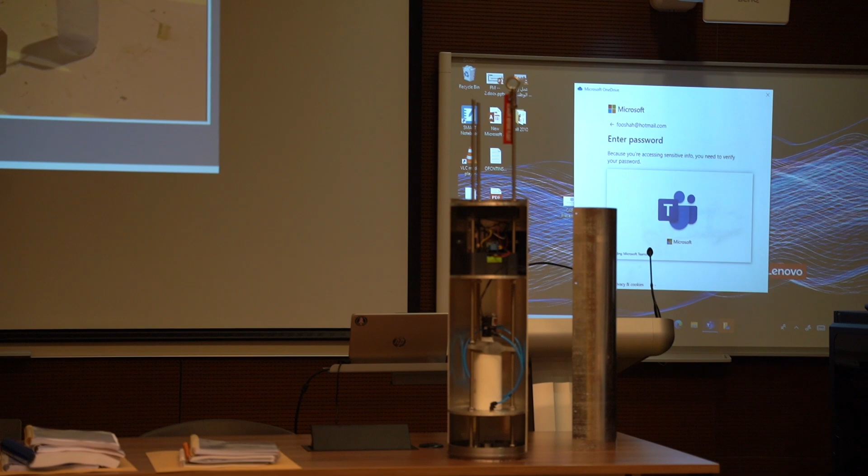The final step is to link the solenoid valve to the battery to let the air flow from the bottle to the tank. And now the bottle is crushed, which means the air has flowed successfully from the bottle to the tank.

Now with the final test, for the avionics system, we wanted to test out 2 different modules. The first module was a flight module used in the Pioneer rocket, and the other was the atmospheric module used in the Ambition rocket. For the flight module, we wanted to ensure it was able to ignite the solid propellant fuel to commence the recovery system.

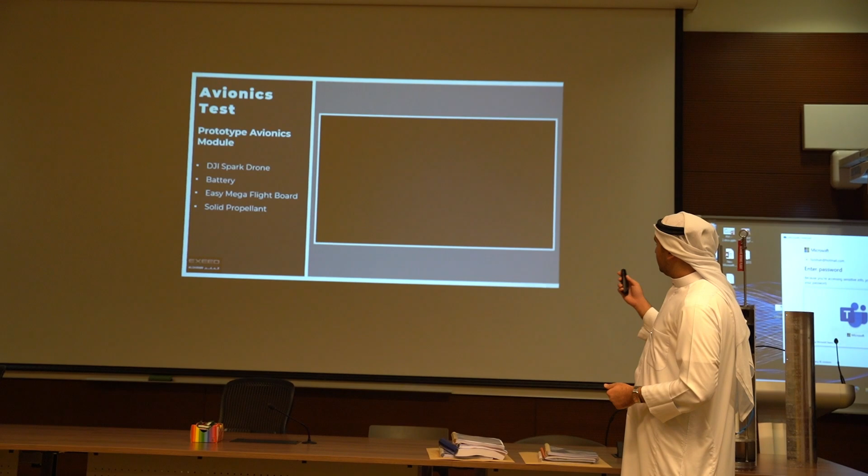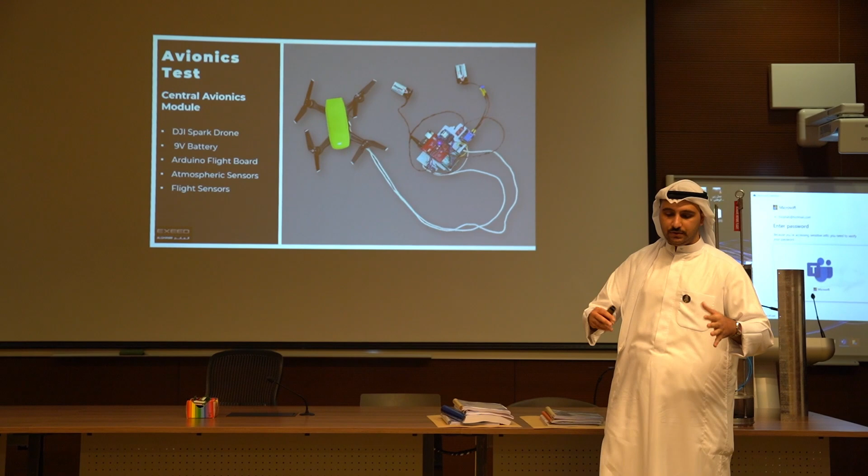The second avionics test was done on the atmospheric module. For the atmospheric module, the aim was to get back data to make plots of the temperature, pressure, and humidity gradients of the atmosphere.

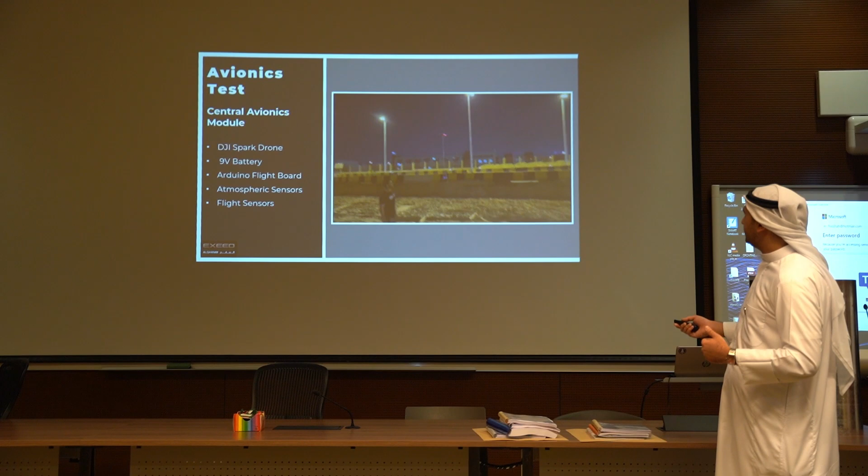So we used the same drone again, but this time the ascent rate was much slower to simulate the descent rate of the rocket for more accurate data. As you can see, the ascent rate is much lower than the previous test. So it returned back data, put into an Excel sheet to give back, as expected, the relative humidity, temperature, and pressure, which were coexistent with the weather temperatures on that day.